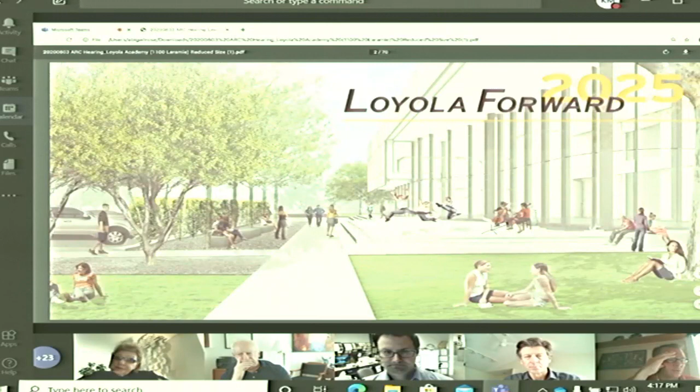As a little bit of background, I just want to let you know a few things. We did have some meetings with our neighbors. We had a neighborhood meeting right before coronavirus hit on February 12th, and we showed initial drawings, initial pictures, and so on.

Some of it had to do with the success of phase 1, and we took the opportunity to introduce phase 2. Unfortunately, we had to have our July 8th meeting virtually, but we had pretty good attendance, and some common themes rose to the top that gave us the opportunity to celebrate phase 1, but also talk about some concerns they might have in phase 2. Really, it gave us the opportunity to answer questions.

Some of those questions were about shadows, the new location on the northeast corner of the campus, sight line, the view line from different areas in the neighborhood, and what kind of neighborhood impact it would have in terms of traffic, stormwater, and so on.

There were also questions about the trees, the type and species of trees that would be planted on campus, and the trees we'd lose. What was nice is we were able to work with our community and neighbors. We've really changed the relationship in the neighborhood. Phase 1 gave us the opportunity to be more transparent, and that's really helped us in phase 2.

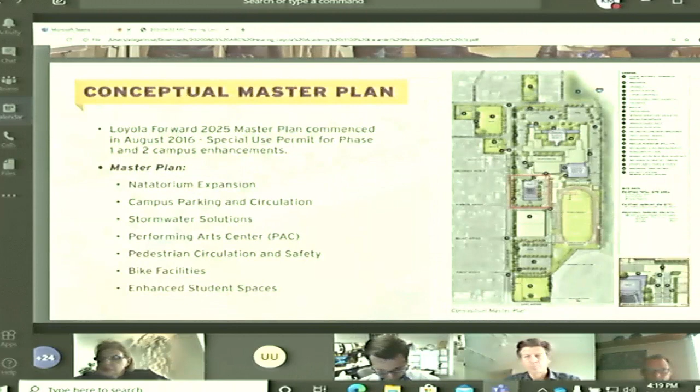I think everybody in the neighborhood who's come for a tour, or driven by, would agree we're proud to have one of the best pools in the area. It also really answered some circulation and parking questions, and I think we did so without sacrificing any design. It was actually a chance for us to improve our campus, which I think the neighbors would tell you.

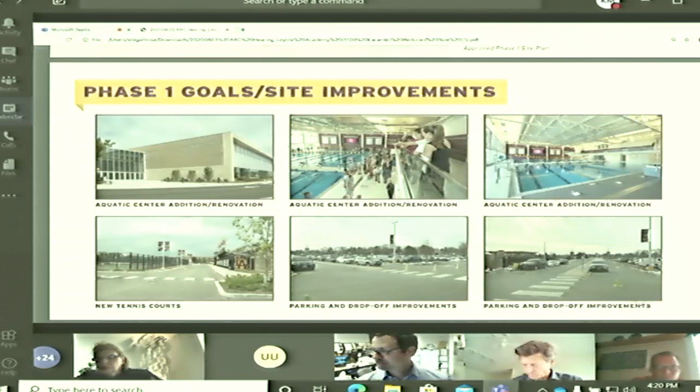If you go to the next page, we start to talk about phase 2 site plan. You'll notice the original red box was the original location. Sarah Lundgren, our architect at K&S, can speak specifically as to why the location was moved to the back from an architectural standpoint. But what I can tell you is it really made sense in one thing: it was connected to the school. Originally, it had been a separate building. And also, it was about the impact on the neighbors and the neighborhood.

Finally, if you'll notice that grass area just south of the purple building, that's our quad. I remember a meeting where they said, build a theater, gain a quad. It just really encloses the quad there. Putting it back here in this back corner, the northeast corner, really helped with landscaping, parking and circulation, and again, the impact on the neighborhood.

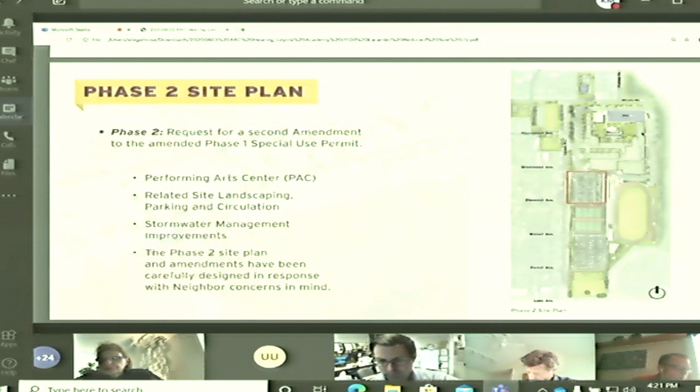So I think we're in a really good spot. I think what Sarah and her team have done is amazing, and we're doing this through a very weird time with this COVID situation. I think we're going to be ready when, hopefully, the COVID thing starts to be behind us, so we have something to celebrate as soon as we get out of it.

So from here, I'll hand it over to Sarah Lundgren, our architect from K&S, from Krueck and Sexton, and she can walk you through more of the specifics of the structure.

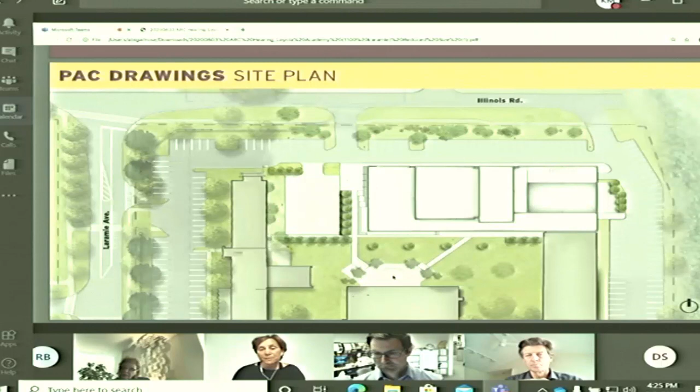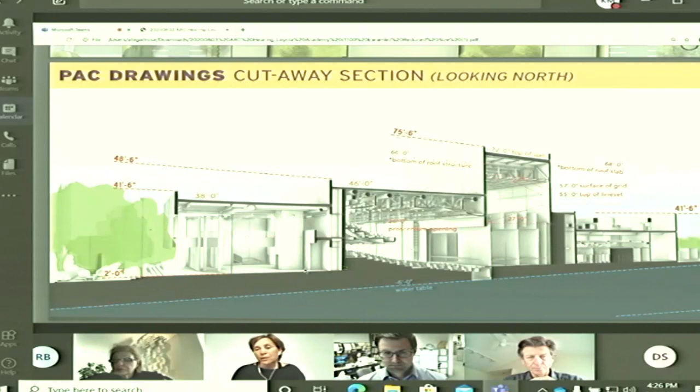As you move through the building, you get to the theater house, and what's shown here has kind of set up the baseline for the height of our building, which is the water table. The water table on our site is about 6 feet below the 0-0 line for the site, so it's about 8 feet below our ground floor. That's the lowest point of the pit. From there up, we get the height of our fly tower.

For our performance, we have a 24-foot high proscenium opening, which is 26'0" nominal dimension. From there, we have a 27-foot height to the bottom of our curtain. When you fly the curtain up—so it's a 25-foot high curtain—you get to a top of line set surface of grid, which is 55 feet, 57 feet.

The line set is the thing that hangs all of the scenery and elements that become part of the daily workings of the stage. From there, 2 feet up is the surface of the grid, a walkable surface necessary for maintenance on a regular level within the fly tower. Then you have to be 8 feet up to the bottom of the roof structure, then the bottom of the roof slab, and then the top of the parapet. All of these things add up to 75 feet 6 inches as our highest dimension for the building.

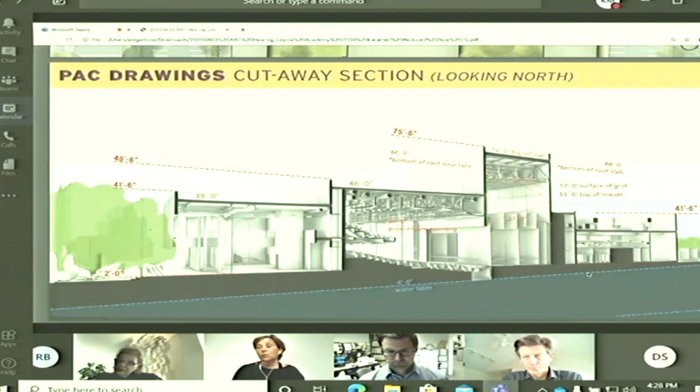We're currently working on reducing that, and we had a meeting with the zoning board of appeals a number of weeks ago, and it was approved unanimously, which was wonderful. But the reasons for all of these height differentials is really because of safety. For Loyola to provide a safe experience for their campus, for their students, for everyone who will be operating this is the reason we're looking toward using a fly tower, and why Loyola has been committed to it. We wanted to explain that for everyone.

The other volumes are also higher than normal simply because of some of the decisions that were made. One decision made by Loyola was to use a balcony. By utilizing a balcony, we're able to keep the theater into the footprint we have on site, and we're also able to give a very intimate feel for the space. About a third of the people inside the theater are sitting in the balcony, and about two-thirds are sitting in the main space.

This gives you a sense of those height relationships. We have acoustical baffles, a lot of mechanical and structural elements. There are trusses spanning across the theater house to reach the precast walls, which we're actually utilizing for structure as well as acoustics.

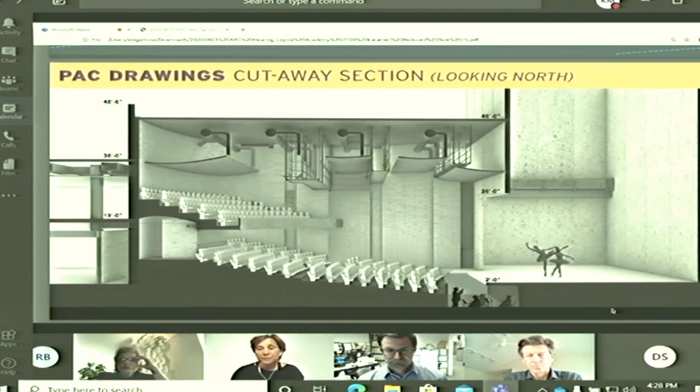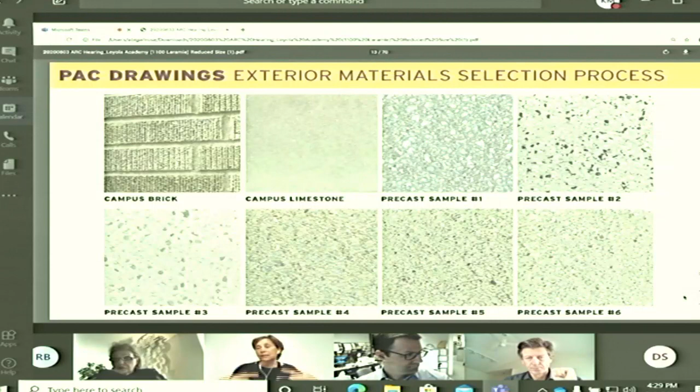This shows a number of samples we've gone through trying to get the right blend of, let's call it contextualism, but also a very vibrant building. We don't want a brown building—we want a happy building that blends with the campus and takes it one step further. The next slide shows the process we went through within our office to hone in on this, and this is where we've landed at this point.

What we're recommending is a precast with a very small amount of tint to match the limestone of the new natatorium building, which is the brightest limestone on the campus. Here you can see we're recommending an exposed aggregate with a very soft sandblasted finish. This makes it look not flat—it helps give a little bit of depth to the surface.

In these pictures we were really trying to evaluate the difference between the precast next to the limestone on campus and next to the brick on campus. We've landed on our recommendation to go with the precast material shown at the top of each of these images, the lighter one.

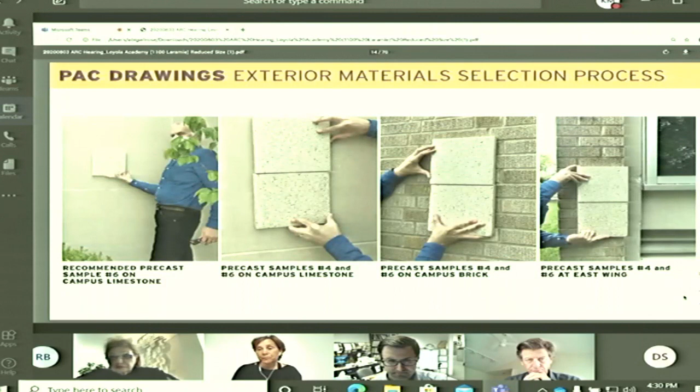Here you can see a range of the material samples on the project. Along with precast for the exterior enclosure and structure, we're also looking at poured-in-place polished concrete floors. We're utilizing a manufactured limestone, which is the TAKTL concept block you see here. This is a rain screen material used on the west and south portions of the building, and part of the east side, along with additional materials on the interior. The last material you see is called fritted glass.

We have a large extent of glass on the west and south sides of the building. This is for connection from the campus and from Laramie Avenue, to view inside the building and open it up. It's fritted glass, and it's actually also bird glass. We're working through our specification process to make sure we use the characteristics specific for bird glass so that we don't have casualties.

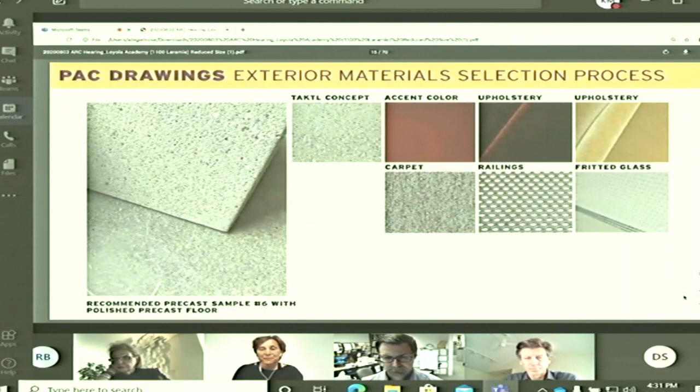This is pretty much a repeat of the previous slide that shows all of the materials that we have on the exterior of the building. The south elevation is really a place where all of those materials come to play. So the south elevation is right on the quad. We have the precast wall panels that are partial structure for the stage house, full structure for the theater house, and then the TAKTL panels that ring around that on the south face of the lobby.

We also have precast again on the bottom band on the south wall, right adjacent to the quad. We really wanted to reintroduce that material again so that it felt harmonious with the rest of the building, and wasn't just two or three separate things. You can see on the south wall the double height glass and then the single height band that proceeds past those precast panels.

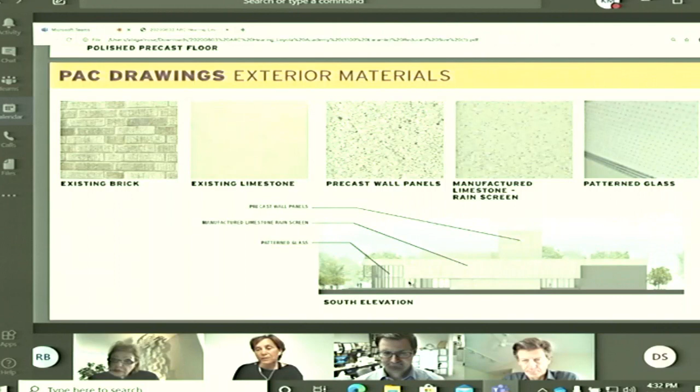This is an enlarged elevation on the west corner of that south elevation, and we have a number of plane trees that are going to be installed, and Cohen Landscape Partners will explain that in a little more detail. But the landscape strategy is really part of the performance of the building. We're very much trying to achieve, to the greatest extent possible, our commitment to the 2030 commitment, which commits to reducing energy use by 2030.

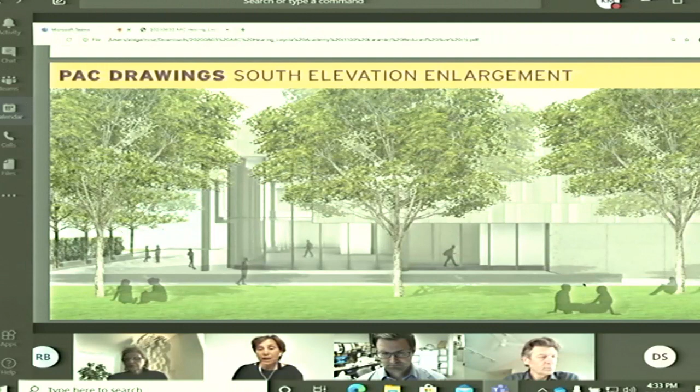And so the landscape becomes an integral part of that story. It helps shade the building in the summer and helps open the building up in the winter. You can see how that delicate relationship with the materials on the building and the glass facade coexist in the same place to create a lobby experience that will be very comfortable.

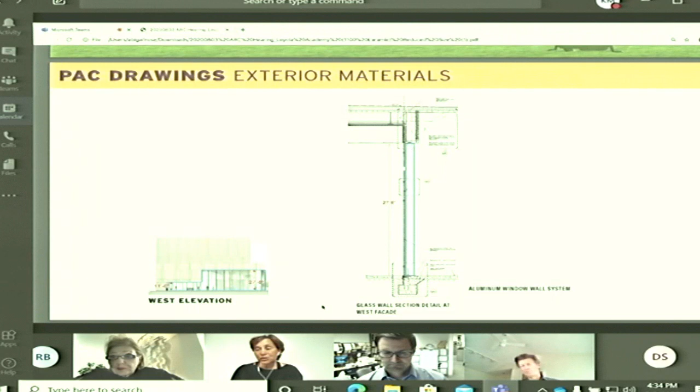So we're just now entering into construction documents. We are in the process of developing what this system really is. But right now, it's developing as a very thin aluminum mullion system, butt glazed on the exterior. It's an undulating facade, which creates softness and some visual interest in terms of its reflectivity quality, which will hopefully not be overwhelming, but just a super minimal presence. The goal is to let you visually enter inside.

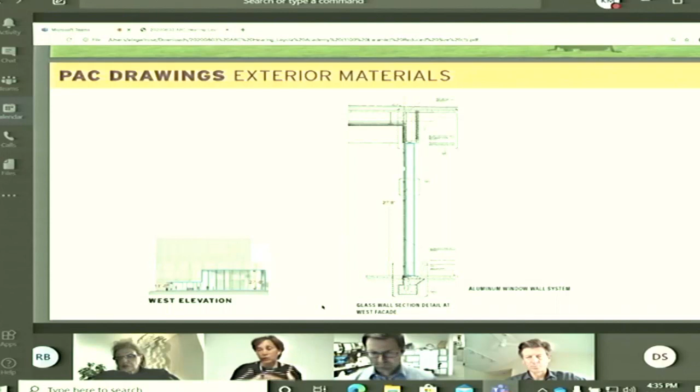In terms of the materiality, because the precast at this point is a given, we've tried to take the four volumes that we have and really break them down in composition so that we have a volume that represents the back of house, a volume that represents the fly tower, one that represents the theater house, and one that represents the front of house or the lobby. And that's where everything starts to open up.

There's a glass, kind of peekaboo window there. That's where the rain screen system starts. That's where we open up and carve out of that entryway to allow people to enter and to allow that stage performance to happen. But at this facade, what we've done is developed a detail where the precast panel has an expressed corner.

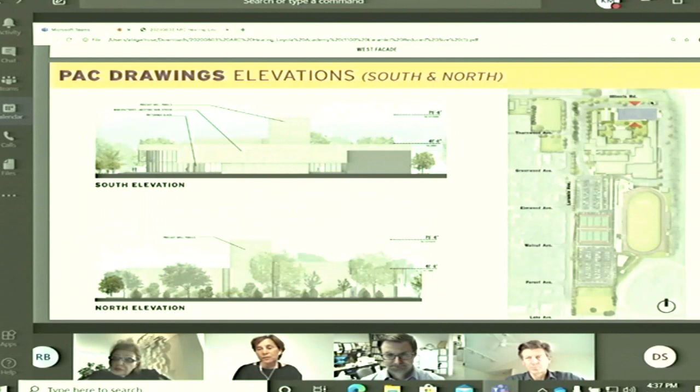It's 24 inches deeper to allow for a recessed panel. What that recessed panel does is really allow us to break up each of these individual volumes of the building, get some shade in there, and help express it as smaller volumes put together. We're also keeping all of the trees in the right-of-way intact. We're not demolishing or removing any of them.

We really feel it's an important soft buffer between Laramie Avenue and the building to keep that in place. And then lastly, these east elevations. I talked about the west elevation already, but the east elevation basically faces the expressway. We are adding landscape there because our chiller plant is back there. The chiller plant will be fully enclosed with a fence, which will also perform acoustically. But to give some softening to this part of the campus, we're suggesting adding trees to that side of the elevation. The goal is to essentially extend the face of the existing east wing over and bring your eye around, allowing for traffic.

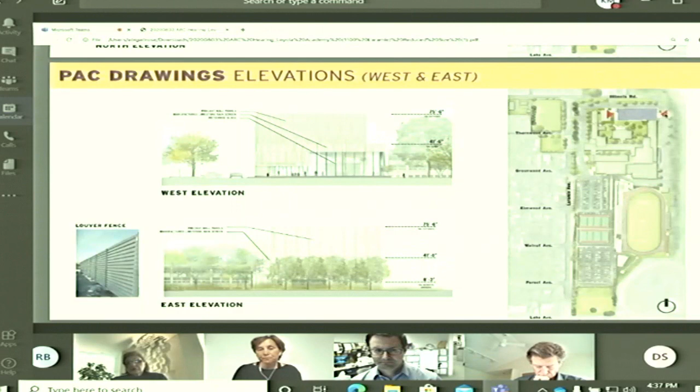There's also an access up to the mezzanine level, which is where the control room is for the theater. That's really a back-of-house entry, so we're trying to integrate that from a volume standpoint. But there's also an elevator, so handicap accessibility has been very important. Universal accessibility is one of the reasons we have our building elevated two feet, to allow for an even ramping system up and through the building. We even carry that into our connection with the east wing.

Along the south side of the project, as you pass through the lobby, is an art gallery. This is one of the critical program elements Loyola wanted to keep in play. This is a fine arts building, for the entire fine arts faculty and all of the students, to really amplify that program. So we're allowing for quite a bit of area on that south wall to provide ample art and gallery space for them to showcase their art.

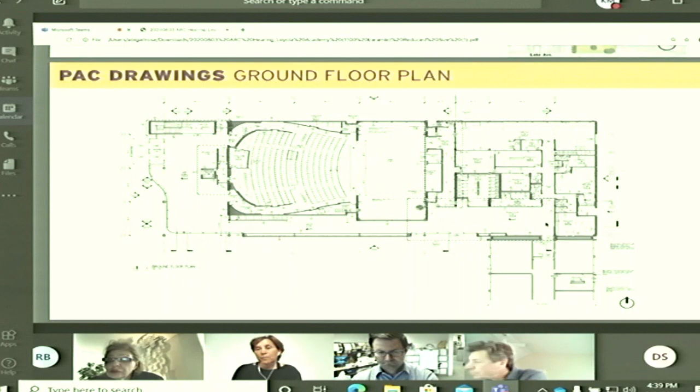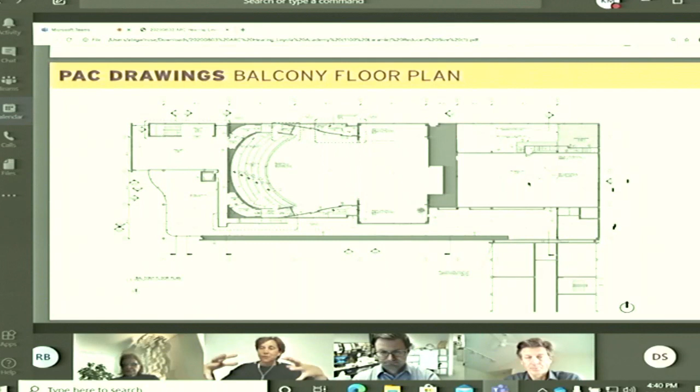The only other program you see on this level is the mechanical pit, so I want to point that out. We have three air handling units within this space, and they're basically bound by walls that are higher than the units themselves. This is the critical method, I guess, for making sure that the noise within that area stays within that area.

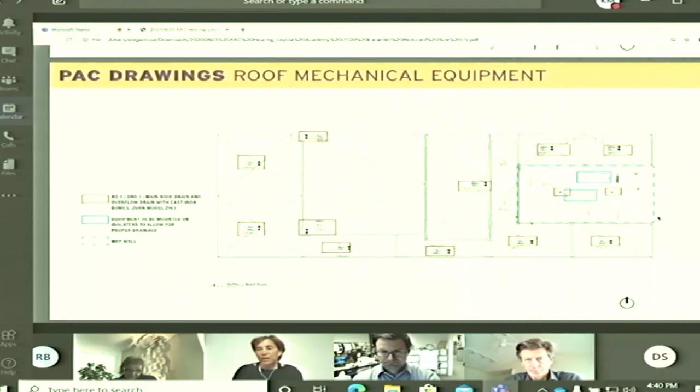And this has really been pivotal for us in terms of the development of the project and the concept of the project. Here you can see an example of how that space might be used on a daily basis. We're hoping it really enlivens the quad and brings all of the different aspects of being in high school and having a Jesuit education and being enveloped within the arts together within this beautiful landscaped space right on the periphery of campus.

You want me to jump in here, Sarah? Yeah, please, Shane, that would be great.

Hello everybody, I'm Shane Cohen from Cohen Partners. I'm a landscape architect and urban planner. We were involved with Sarah and the entire Krueck Sexton team from the very beginning, conceptualizing this building, serving as this beautiful protector for the campus and formalizing this quad. A huge focus has been the trees and their dialogue with the building and the neighborhood.

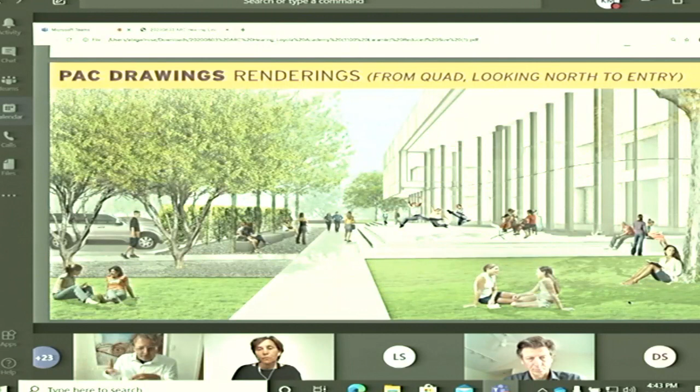This stage is up on a plinth and also has universal accessibility from the north, so any able person can access this very easily.

This is a view from the other side, approaching from Illinois. We'll get into lighting standards a bit, but we've kept with all the lighting standards except for these three column lights here, which are part of the gateway experience. You'll also see this line of honey locusts out from the building, and you sit under those, with the beech hedge I mentioned right in back of them.

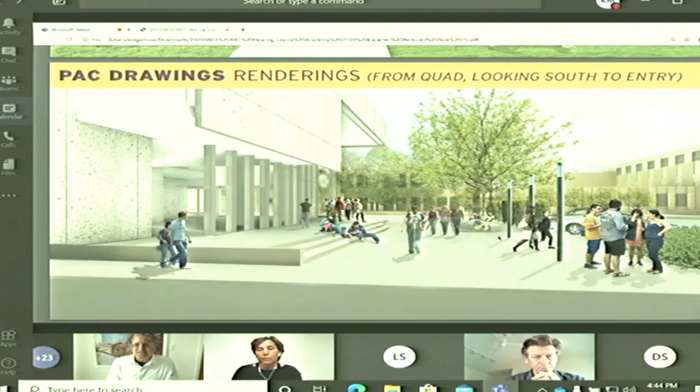This bench is meant to be utilized at all times of day, but also during a performance. If you have an interactive performance up on the stairs and the stage, you get this back and forth of community, really, bringing people together.

As you back up here, we inventoried all the trees and shrubs along Laramie Avenue, and made the decision to just save everything that was healthy out there, letting that diversity that has always been on that street be part of the undulation that the building has here too.

From this distance you really see what the neighbors will see, what you see driving down Illinois is this more undulating form, and as you move through it, the trees formalize a bit more in relation to the building. One other thing to point out: this shows the scale directly from Illinois that we'd experience with this large building, and how we've tried to break it down, but also at the corner dematerialize it so that you can penetrate that glass and almost see through it into the quad space.

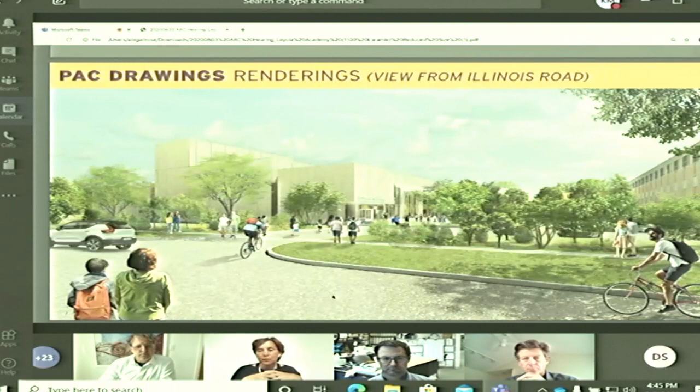I'll walk you through a bit more of the site planning principles and the actual plant material. Sarah already did a great job explaining this building as formalizing the edge of the quad and really a protected zone for the students. But it's also buffering noise from the quad out into the neighborhood, which is another strong component of the siting of this building.

The circulation around the building includes pedestrian circulation sized for safety, and the amount of trees we put back in were 28 new trees that we're planting. We'll get into the removal and planting plan here in a moment.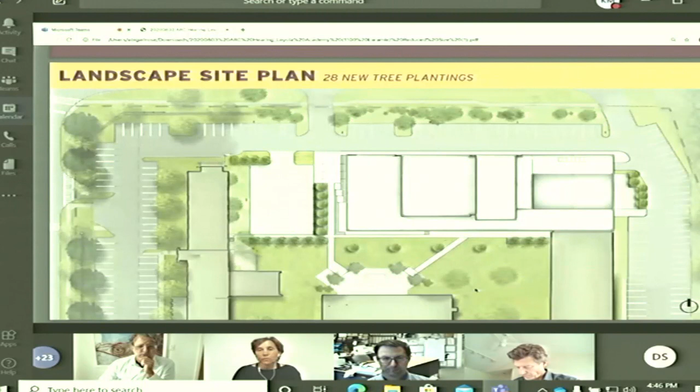This is the tree removal plan. We are removing 15 trees to construct this building properly in this place, and we're putting back 28 trees.

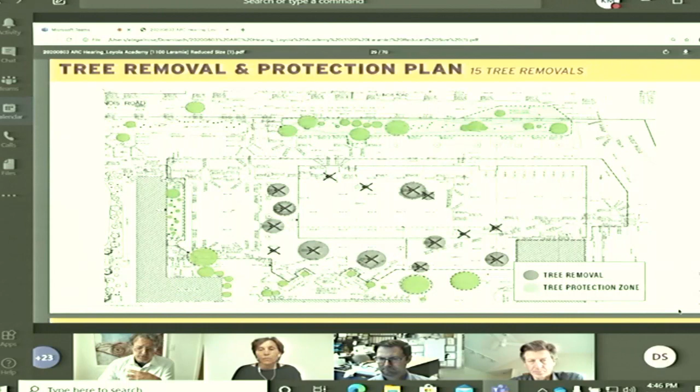The key has been to really embrace the diversity that's called out in all of the vision plans for this part, for the landscape. So we have great diversity, which I'll go through, and we've also really increased the size of the tree that was required. So we're putting in big trees, not little trees.

This is the surfacing plan, which shows that the precast Sarah showed you on our cast-in-place concrete, we're putting an aggregate in and acid etching the surface to get a material match with the precast. There's also a small amount of pavers at the front door. This also shows that in some areas we're using a loose aggregate for permeability. I should have mentioned that we've collaborated closely with the civil engineer on permeability and stormwater throughout this whole process.

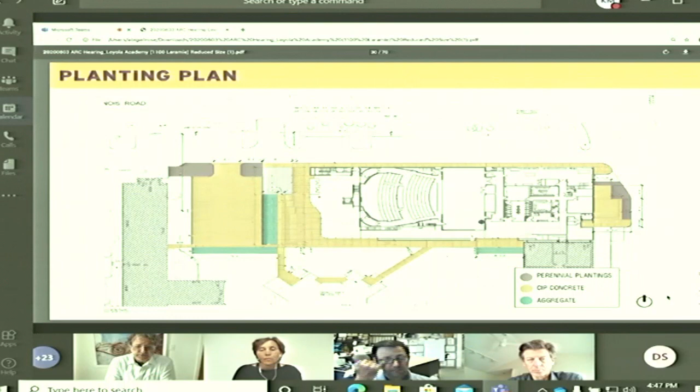So we'll just get through the diversity here. Again, the key to us after reading your plans and vision was diversity and also strength and maintenance. So we have a really beautiful concert of trees here. We have service berries, and I'll show you where those are on the plan, but they're really on the quad side. They turn a brilliant red in the fall. They're also something that birds love, so it's a fun thing for the students as well, connecting them to nature, which I think we're all more aware of during these times.

Honey locust is a light shade tree that we have directly adjacent to the building to filter the sun, but it's also a tree that's really comfortable to sit under. It's not so dense, it lets in nice shadow, and it turns, in contrast to the serviceberry, a beautiful yellow in the autumn. Then we have a clump of Whitespire birch out near the parking, which is also yellow in the autumn, but known for its winter interest. It has beautiful white bark that will be showy as a kind of gateway piece as you pull in during the wintertime.

Ironwood is used, as well as some shrubs, to screen the service area in the back. London plane tree was selected for its kind of bulletproof nature as the shade tree in the actual commons itself. So there's a row of those within the commons, and it's beautiful. Its bark is also really pretty in the fall as well.

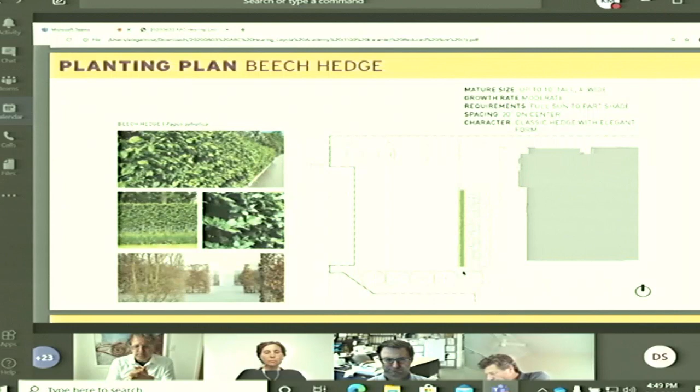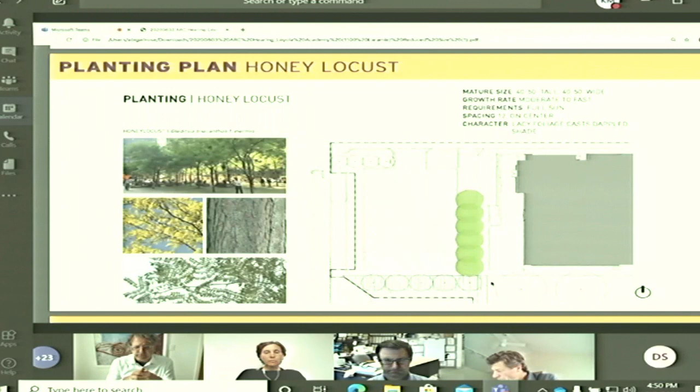Right in front of that is the row of honey locust that I mentioned, again this super light shade tree. This is where we have those communal benches that are meant to be about community and bringing people together, in a kind of dialogue with the stage, and those turn a beautiful yellow, with leaves that are very feathery in all seasons.

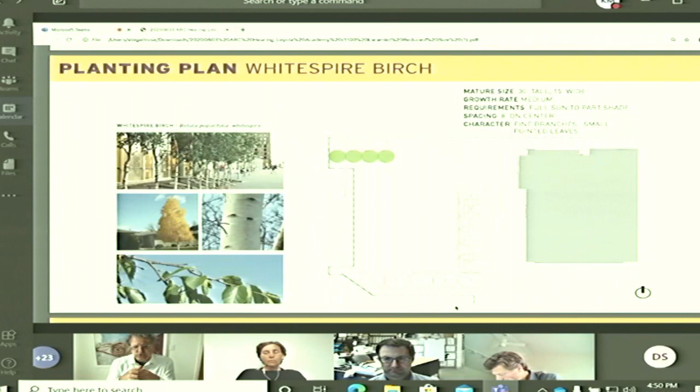And then the birch is this kind of line of birch protecting the parking, screening it from Illinois Road, and providing another layer of planting as you look from Illinois in towards the building.

And then this line is the service berries, one of the first trees, the red bud service berry, to bloom in the spring. So it makes you feel like spring is here. We all know how hard it is to get through winters where we live, so it's a welcome sight when the service berry blooms, and then it's a gorgeous red when the students come back in the fall.

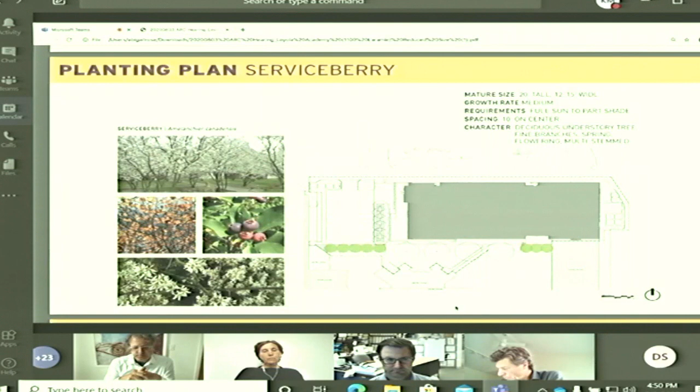And then the London plane tree, it's got year-round interest, big leaves. It's just a classic tree. Everybody knows this tree from the great parks in the Chicago area, both for its fall color and its bark. And then the ironwood on the backside for screening of the service area.

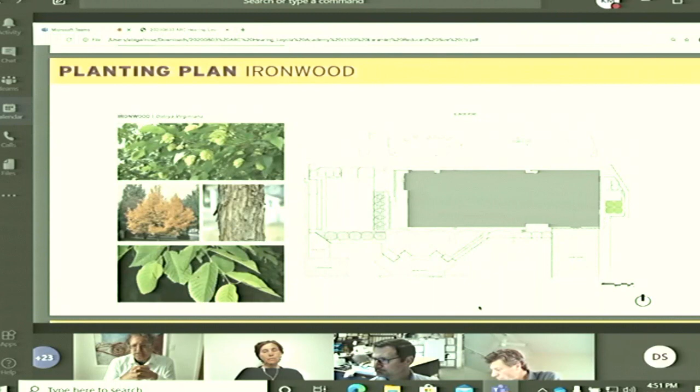Which you see, this is a view from that where we have kind of layers of shrubs and perennials and the ironwoods.

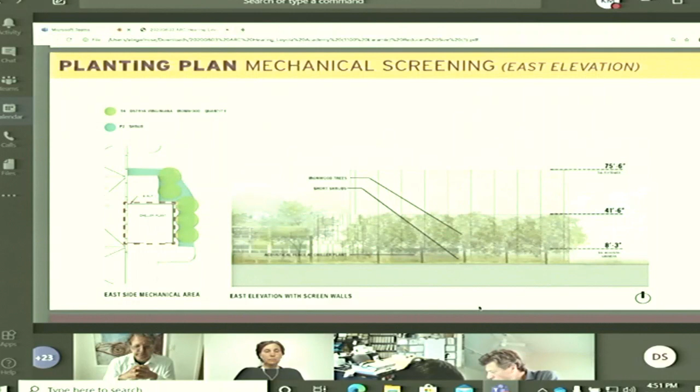Site lighting is really, the campus has a standard, and we went with that standard. So we have the parking lot area lights, the same ones. We have some bollards, and then we have these three light columns that we introduced at the gateway to be a little more ceremonial.

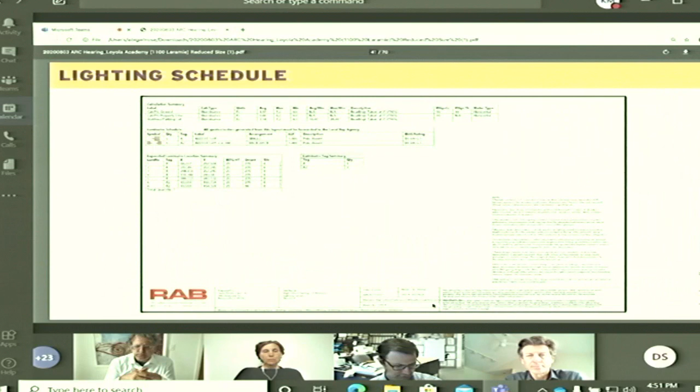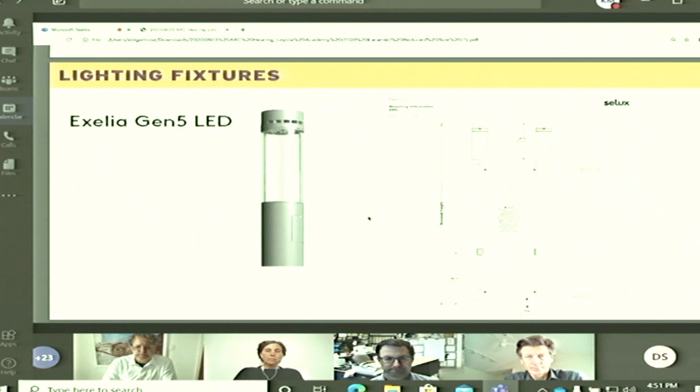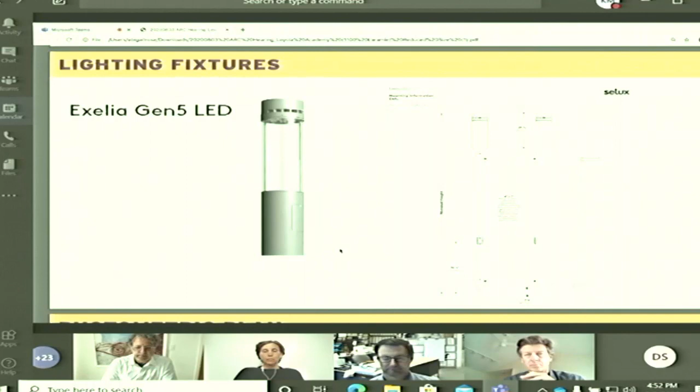And then we closely studied the photometrics, which is really all about safety and even light throughout the whole campus. We've achieved a really nice, even photometric plan, which you can see on the next page, looking down at the building. If you're up above, of course, the building is dark, but when you're at an angle, there's great ambient light that comes out of the building depending on what side you're on. We have a nice, even, well-lit, but not too bright space from a neighborhood standpoint. That's the goal of the lighting plan.

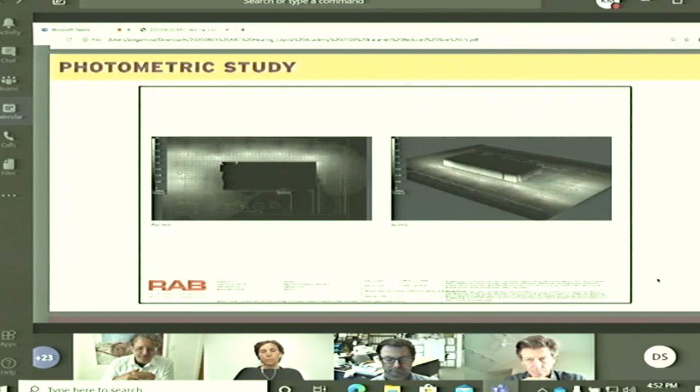Is that the conclusion? Yeah, I just wanted to say again, thank you everybody for your time. The ZBA did recommend the special use permit when we met with them on July 15th. It was a very good meeting, and hopefully tonight you got the detail you needed for phase 2.

And if there's anything I would say in conclusion, Scott Ferris of Loyola has said it — he's been such a partner for us in this, that probably some of the biggest gains we had through phase 1 was the collaboration with the neighbors. Even afterwards, I think the neighbors were skeptical about the size of a new swimming pool and what it would bring. But I think when you take them through, we didn't cut any corners, and we're not going to cut any corners. This is an important project for us. So I think we've set a standard for ourselves that we're confident will make not only Loyola proud, but also our near neighbors in the village of Wilmette.

So I think at that point, I'll open it up for questions for everybody.

Okay, let's start at the lower right corner of the building, right next to the east wing. You can see three bands. This lower band...

Abigail, if you move your cursor up just a little bit to the bottom of the mechanical wall, yeah. That's the start of the TAKTL system on the east side. If you follow that all the way down to the bottom of the building, over to the southwest corner, and then up to the northwest corner, that's the extent of the rain screen system.

The reason for this is that the north stair and the theater house are both structured with precast. The precast is literally the load-bearing walls for those structures. The fly tower's precast is bearing its own weight, and then it's connected to a steel frame because of the height. We haven't been able to get the precast to be load-bearing there yet, but we're looking at options. On the north wall of the scene shop, it's also precast for acoustical reasons. So a little bit more than 50% of the plan perimeter is the TAKTL surface, and slightly less is precast.

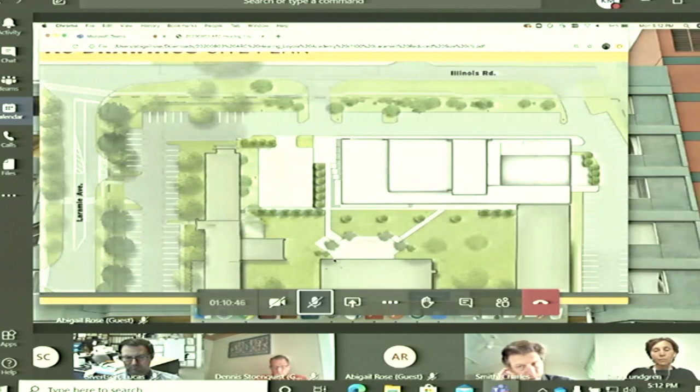Yeah, no, good point. I think any material we put on the east and north sides of this building is going to face a different set of elements than the west and south facades. No question—they have a whole different set of parameters to deal with.

We've been working with Valenti Builders, who's a partner with Loyola and a partner to us on this project, talking through the pros and cons of using sealers on the precast. The tactile comes with a sealer by nature, so we're just starting to get into that development as we're in construction drawings right now.

Yeah, I just think going in with eyes wide open and understanding the maintenance for that material is going to be important for the client to understand. Yep, there's maintenance with a sealer and maintenance without a sealer, so it's kind of just trying to identify what that reality is.

Right. And could we go to the plan view showing maybe the site plan showing the loading dock area, please?

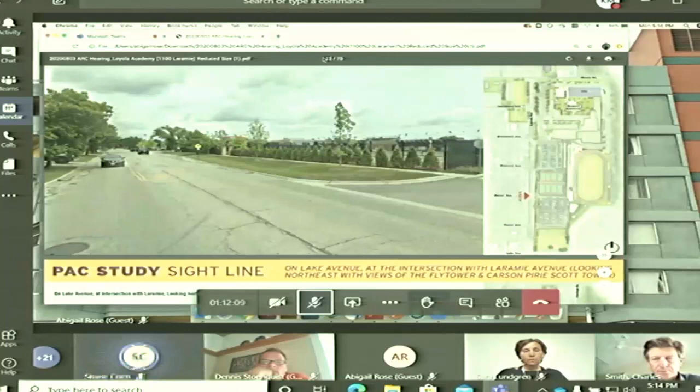Okay, so looking at this, it appears that the service entrance is in the northeast corner. Is that correct? That's correct. And that is basically an entrance into the scene shop.

Right, and what is the largest vehicle size that can be accommodated there? Just a standard size box truck. So there's no tractor trailer expectations with scenery and materials and that type of thing? No, we're mostly planning right now for delivery of materials and broken down sets if they need to be moved off site. Okay, and it's obvious why I'm asking, because it's quite short for a truck, plus you have cars parked there, which will make it even more difficult to maneuver. Yes, yeah.

I half of me wants to say you're going to have to lose all of those spaces from Illinois down to that location to maneuver for the trucks and keep those cars from getting in the way. It's easy for us to plan it out, but it's different in reality when the truck drivers go to and from. So I suspect you don't have that luxury, but that would be the ideal situation.

Yeah, I definitely think there's always some procedural things that the client is going to have to coordinate. So deliveries happening after the bulk of the students are no longer parking in those spaces will be something to coordinate. Functionally, I see that as maybe the biggest challenge on the project, the servicing of the building, just based on that tight corner there.

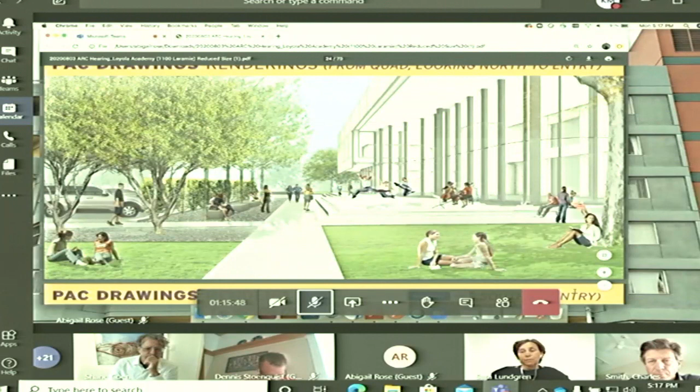I'll mention one thing, and I'll let Dennis talk, and maybe Shane too if he'd like, but we're not planning to have snow equipment up on the stage - this would be shoveled by hand. There's a ramp that allows accessibility for the stage, but really what we're planning for is pathways at grade level that will allow for snow plows and maintenance equipment used by Loyola's maintenance personnel. We do believe there will be some amount of snow on the stage, but we don't think it's going to be significant.

There's a significant overhang at that location, and there are also trees. Those London plane trees will also help prevent a little bit, but blown snow will come up onto the stage, and it will have to be shoveled.

Okay, as long as that process is understood, I just know it's a tough climate. You go out 5, 10, 15, 20 years, and the salt and everything - it's a tough climate.

So, Shane, are there mow strips around the balance of the building, or is sod grass coming up to the face of the building?

For the majority of it, there's a mow strip, but here - Ethan, correct me if I'm wrong - here we're allowing people to kind of sit right on the quad, so it doesn't wrap around this one side. Is that correct, Ethan? Yeah, the turf never reaches the building itself, there's always a sidewalk. Okay, it's a flat sidewalk condition, it doesn't go right up to the vertical.

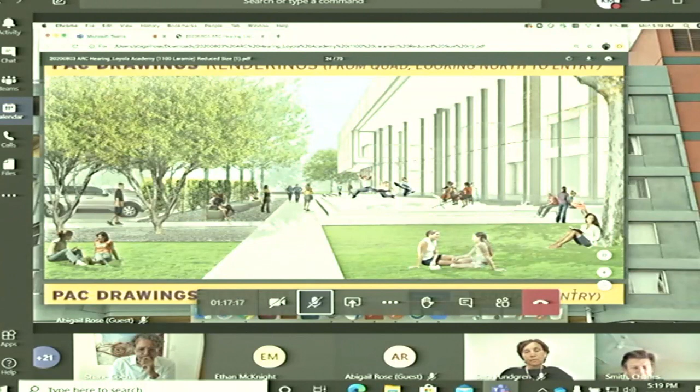So in a sense it is a mow strip, it's just not like an aggregate, it's just a sidewalk. Right, yeah, even on the north side of the building. Yes.

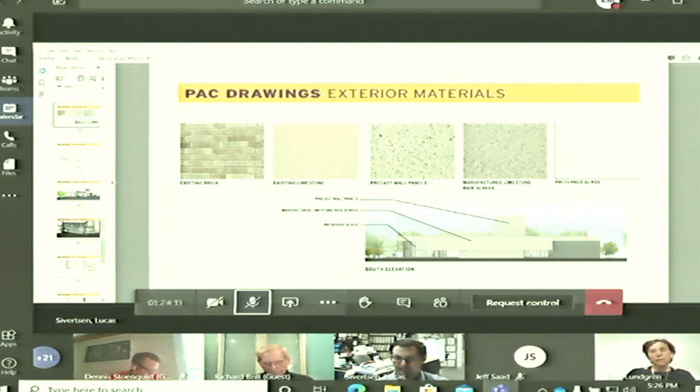And to be honest with you, I'm pretty picky, and it didn't bother me—they look quite integrated. Okay, thank you very much.

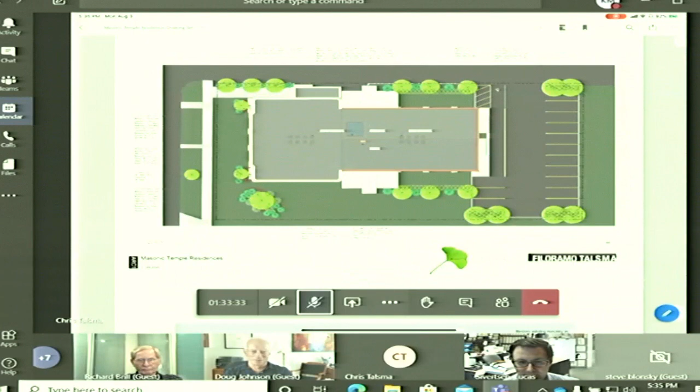Okay. Not working yet? Yep. You're up. Oh, I was? Yeah, you're up. Great.

The biggest component anybody is going to be looking at with this project is these balconies. Otherwise the building is exactly as it is, with the exception of some openings. We went back and considered how many other ways we could do these balconies, and came up with a dozen different concepts. But Steve and Eamon and myself and the rest of our team decided we liked this one best for a few reasons.

We reduced the balconies and peeled them off the rear. They used to wrap all the way around the north side of the building, and now we're just providing them as balconies and stairs.

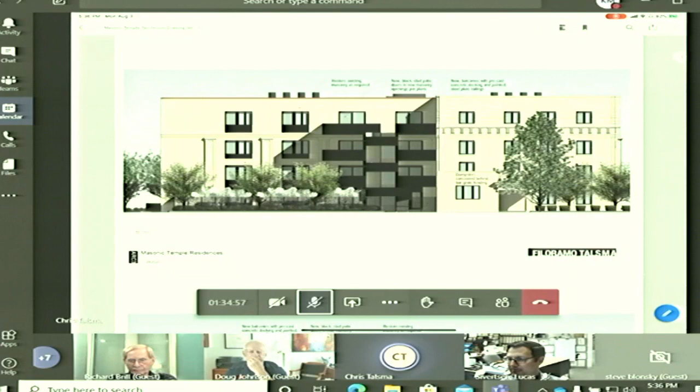One thing I remember saying when we presented last time was trying to make those balconies big enough that users could have a grill and some furniture out there. As soon as those words escaped my lips, I wished I could pull them back, because I could see some people wondering how that's going to look. Part of the conversation then brought us to this place where we thought we would put a solid panel around these balconies.

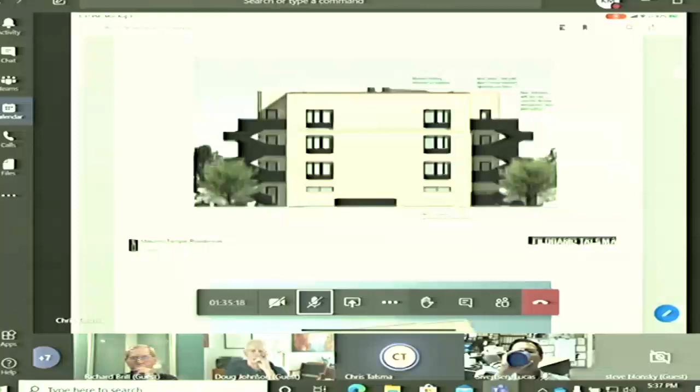So what we're anticipating is something that's kind of bold and sculptural, and also allows folks to put furniture and grills out there without altering the appearance of the building. So it got a little bit more efficient.

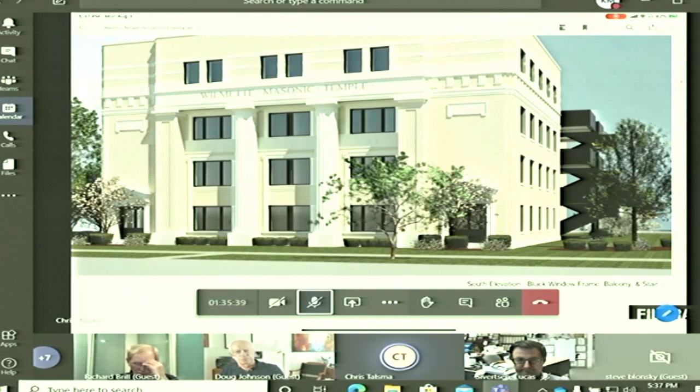We've rendered these with black windows, and I know that's not the original window color. Originally they were some sort of taupey color. We went out there and peeled a little paint off the frames to confirm that, but we're all fans of black frames on our side.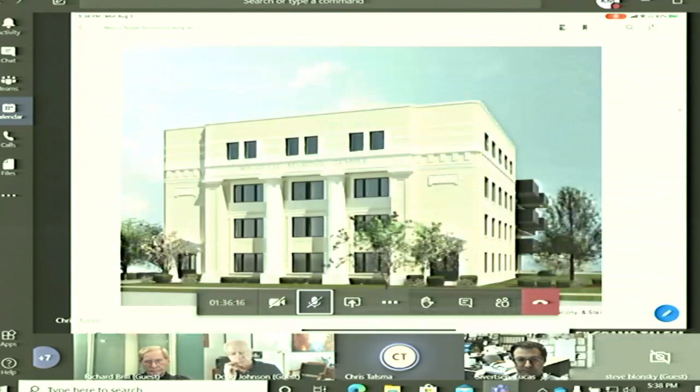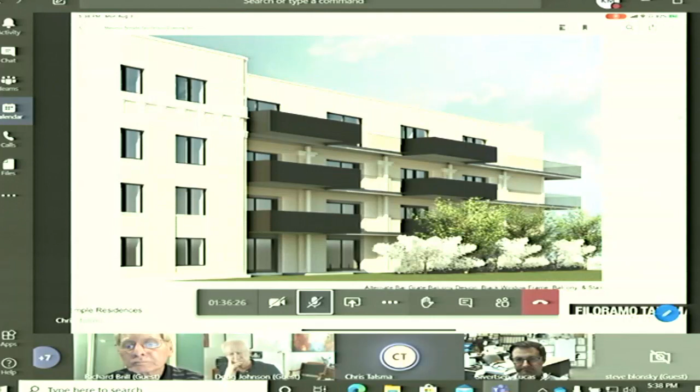And then lastly, just to keep things interesting, if this is plan B, we still prefer plan A, the one we're proposing with the two stairs on the sides. It's actually a little better for egress. However, we didn't really know how this conversation was going to go today, so we thought we'd talk about some options potentially. I think those are the major issues. So unless there's anything I'm forgetting, I'll pass the mic back to somebody else.

May I ask a question? This is not under... could you explain the finishes on the stairs and balconies?

We want to use a painted plate steel. We'll have those plates galvanized to help protect them, and then apply a good exterior grade paint to them. The treads and planks are still going to be that precast concrete.

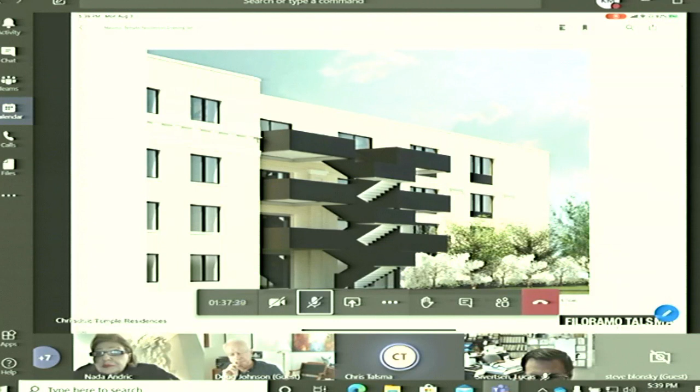I like it for its maintenance. Somebody had some questions about that, but these things are set up nicely for it, and I think it's the right way to go. No staining, no warping, they hold up well. So, two materials.

Thank you, Chris. I guess what we'll do, if that's the conclusion of the presentation, is go around the table again and give a platform to the team. We did have a lot of discussion last time, and Jeff, I don't know if you saw the last set of renderings on the prior submission, which frankly wasn't asking us for any action at the last time—it was more in front of us to get an opinion. But in this case, Chris and Steve are coming back clearly with a different approach. Maybe I'll give you the floor again and see if you have any further queries or comments.

Thank you, Richard. I think this is a great improvement, and I am speaking in response to the owner's desire to keep the building as little changed as possible. So the elimination of 50% of the armature around it is very helpful. But I have to make it short, and I'm going to still talk about my discomfort with the change of the window frames color starting to go into a darker hue, and then bringing that also out on the balcony and the new variation of the existing stair.

I would say that when I look at this rendering, I don't think I would ever say it did not disturb the building under any circumstances. I think this is major—and you have one 3D rendering, another 3D rendering that shows it even better than what we saw—but it looks like a major, as Prince Charles once said, carbuncle on the two sides of the building.

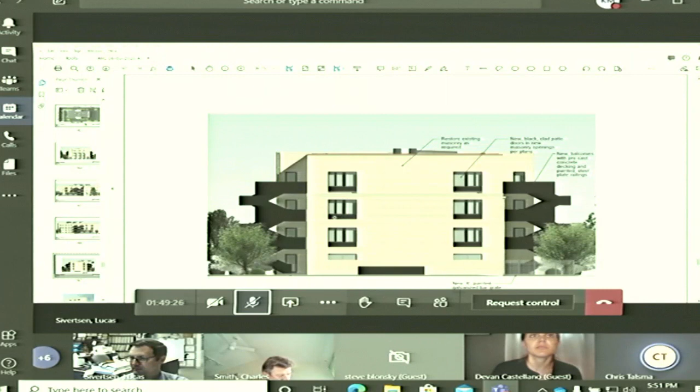So whatever the jambs are, the cladding is supposed to blend into that. For those large openings, I wasn't going to try to install a brick lintel or spandrel, so we kept that language going to stitch it together. It came from the east and west, where there are two-story openings at the first floor that we have to break up now because we're putting floors in. So to keep a similar language across all those openings is why it's repeated.

So when you had the previous proposal, those were somewhat hidden by the guardrail, right? Because it wrapped all the way around. Yes. And some of them were sliding doors because there was a balcony there.

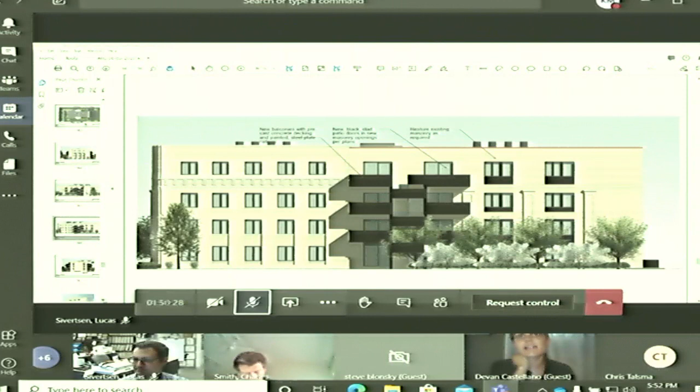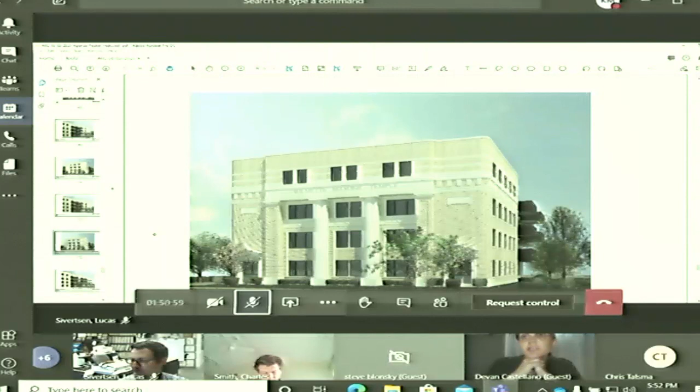From the perspective view from the front, what bugs me a little is just how far these balconies extend. I think it's a combination of the size and the fact that it's black and opaque that really stands out. If there was a way to make it more transparent, it might go away a little more. Possibly another thing would be to add more landscape screening, although those are pretty high up, so I don't know if you could adequately screen it with just landscaping.

Well, one of the benefits of this, I feel, is that if somebody puts an ugly old Weber grill out there, you're not going to see it. That's all my questions and comments.

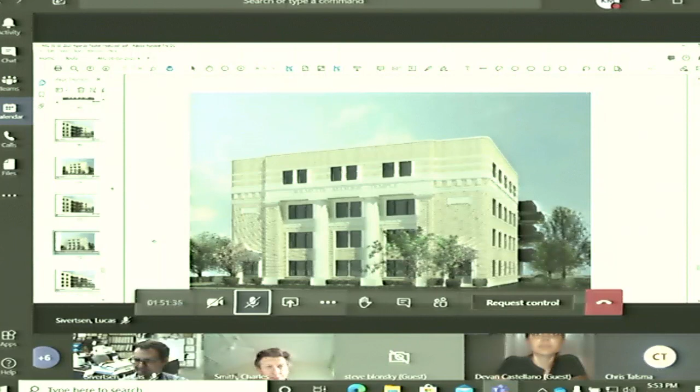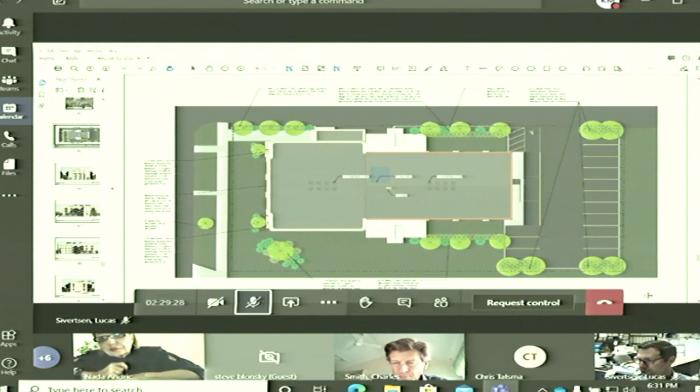So basically, what we're trying to do for the landscaping plan is use trees and hedges as screening from the alley and from the rear unit on the north side, screening their private space from the neighbors to the east. Additionally, planting some new trees in the parking lot to give some greenage, and then up in the southeast corner.

I would like to say, Chris, that you're dealing here with a very formal building. Everything is symmetrical, everything is balanced, and I would like you to take another look at that approach to the building and give it an appropriate response to what the facade is all about. I don't know what you have here on two ends, but what is the gray area? Is that grass or what is it?

So maybe by the 24th you can give some thought and let us know about it. But I do feel that, in addition to screening and everything, you can give this a direct kind of pairing of the landscape with the building.

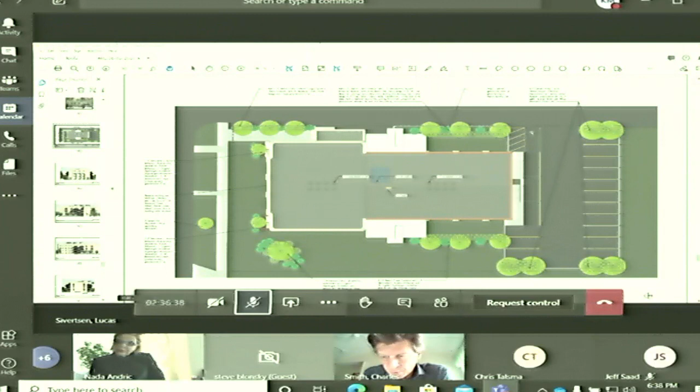Okay, all right. So I think this has been a lot of in-depth discussion. It sounds like the plan moving forward is for Chris and your team to look at a few different options for us. Lucas will distribute those options, and we will get back together in a formal meeting at 4 p.m. on August 24th.

I just want to ask before this, are there any other concerns on the landscaping before we go back to the drawing board, or do we think that's okay? I have no additional concerns.

I don't. I think Nada was looking for a little bit of background on the placement of the landscaping. Nada, do you want more of that when we return to the conversation? I think that this was sufficient clarification. Okay, okay, thank you.

Okay, so we will not call a formal motion on this as a result of this conversation. I think I should make one last call to the public in case there's any public comment that is desired.